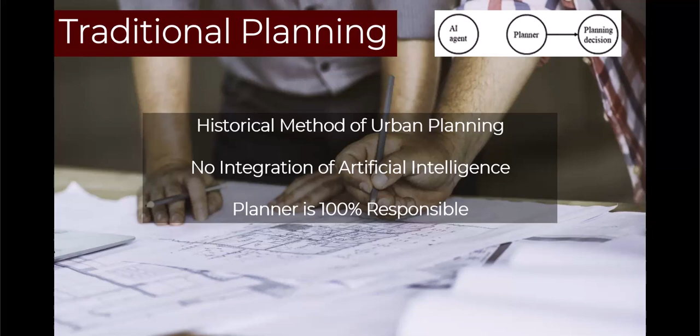AI-assisted planning. In AI-assisted planning, artificial intelligence can collect data, process information, and generate plans. In this level of artificial intelligence used for urban planning, its capabilities are analyzing large amounts of urban data, which includes land use patterns, demographics, and transportation flows. Additionally, AI generation of maps and plans can help planners visualize and analyze urban conditions.

Nonetheless, the planner is mainly in charge here. With the help of artificial intelligence completing time-consuming tasks such as data collection, the planner can make a more effective decision in a more efficient manner.

AI augmented planning. In AI augmented planning, artificial intelligence technology can be used to identify data that is difficult to collect or analyze. It also may uncover hidden patterns from large data sets, simulate stakeholder behaviors, predict impacts of planning options, and evaluate plans. Furthermore, this degree of artificial intelligence technology can also provide feedback and suggestions to improve plans.

AI automated planning. In AI automated planning, artificial intelligence demonstrates strong machine learning and automation capabilities to effectively automate the planning process. Here, artificial intelligence technology can identify urban problems, propose planning scenarios and solutions, and simulate and evaluate new planning policies. And to add to that, artificial intelligence can self-learn from other scenarios and become more intelligent over time.

As it learns, artificial intelligence can better handle uncertainties, provide viable solutions, and mitigate potential risks in the planning process. The planner in this level of artificial intelligence usage is essentially left to delegate and supervise planning tasks and procedures. Nonetheless, a planner can help AI systems learn by defining planning problems and proposing objectives. Overall, the planner fulfills a supervisory role and monitors the outputs of the AI system.

AI autonomized planning. In the final and highest intensity level of artificial intelligence usage is AI autonomized planning. To reach this phase, an AI system must be able to demonstrate a high level of intelligence and show its capabilities in achieving full automation in the planning process. As of now, there are no programs that can facilitate these demands, but a level of artificial intelligence that can reach and even surpass human abilities will be crucial in autonomizing the planning process while considering efficiency, equity, and domain knowledge of urban planning.

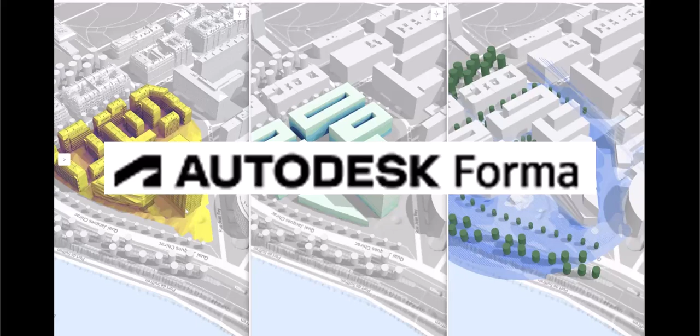Now, let's use what we know and see how we can apply that into urban planning and design. Autodesk Forma, which is formerly known as SpaceMaker, is designed to assist planning and design teams in digitally delivering projects from the very first day. It integrates conceptual design capabilities, predictive analytics by machine learning, and automations to create solid and sustainable foundations for projects. The platform enhances efficiency through intuitive project setup and design automations, aiming to improve the workflow of planning, architecture, engineering, and construction projects.

Oftentimes, planning design firms and teams may have several projects currently in their schedules. This creates a problem where there are several strict deadlines for multiple projects. Autodesk Forma successfully incorporates artificial intelligence to help planners, and even architects and engineers, to conceptualize initial urban design models quickly and efficiently.

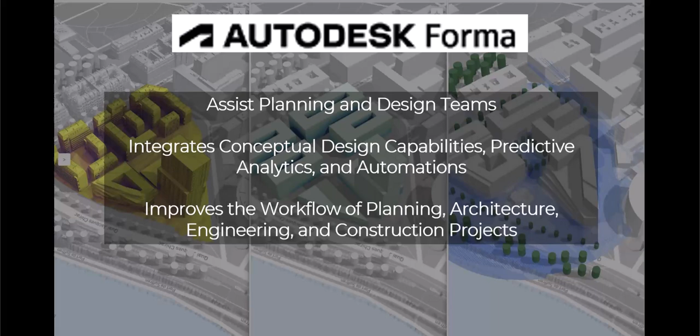The main features of Autodesk Forma that utilize artificial intelligence in their functions are the model generational tool, which is called the Explore tool, the predictive analytical tools such as wind, solar, and shadow analysis, and the automations of the parking demand calculator and site design generator TestFit. Together, these artificial intelligence tools help planners, as well as any other professionals who can greatly benefit from a rapid form of conceptualization in their projects, and lead them to better optimize their planning process.

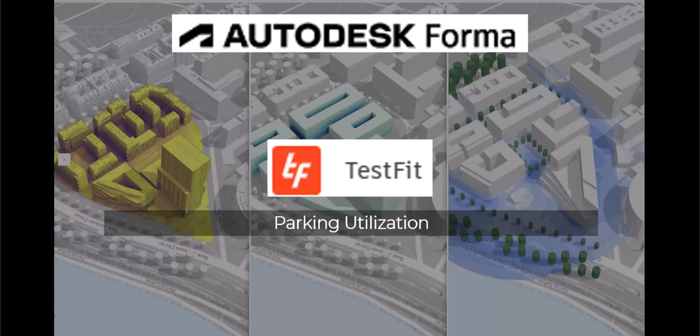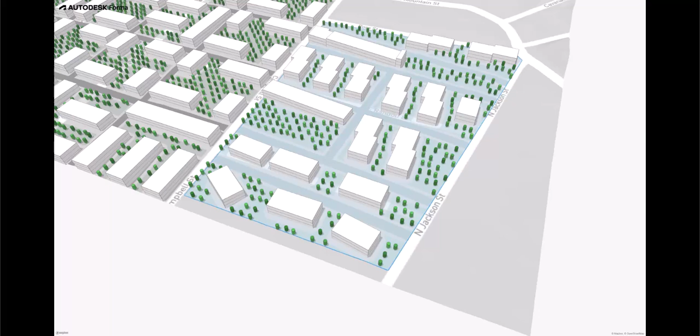The following models are made completely by the Explore tool, and surprisingly, the artificial intelligence integrated in this tool helped generate several models in mere seconds. This reduces the effort and time required in creating conceptual designs to near zero, which is much more efficient than traditional methods. Once again, this integration of artificial intelligence can prove very useful for urban planners and designers.

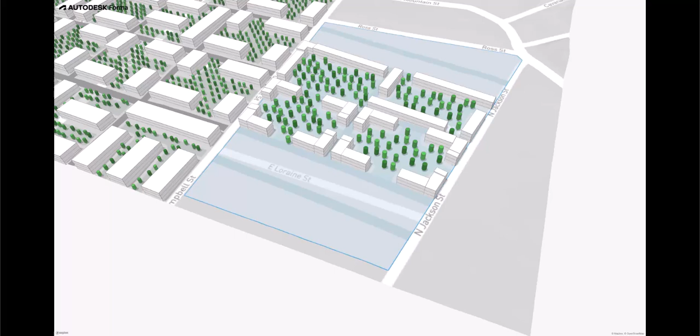Autodesk Forma can be accessed by accessing the Autodesk website on your web browser. Autodesk Forma does require payment. However, you can start a free trial to begin your conceptual designs. Once you have an account with Autodesk Forma, you can access your Forma Hub. Here, we can see our project workspace. You can always start a new Autodesk Forma project by clicking the New Project button. Here, we can select any area where there is geographic data.

Now, let's begin by looking at the Explore tool. The Explore tool can be found at the top of the tool ribbon. To begin, we need to set a boundary. We can do that by freeform drawing, creating a rectangle, a circle, or tracing an existing shape boundary. We'll start with a freeform shape.

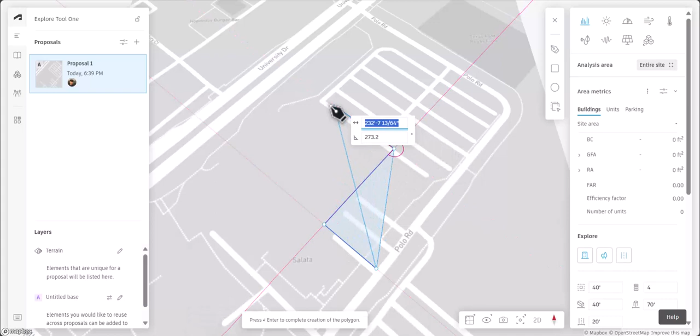As we can see, the generative abilities of the Explore tool have created long, thin buildings and trees, all within our site boundary. But what if we're not satisfied with this model generation? Down below, the Explore tool provides several model generation suggestions. For instance, we can have a long, thin building, several buildings with roads in between, and more.

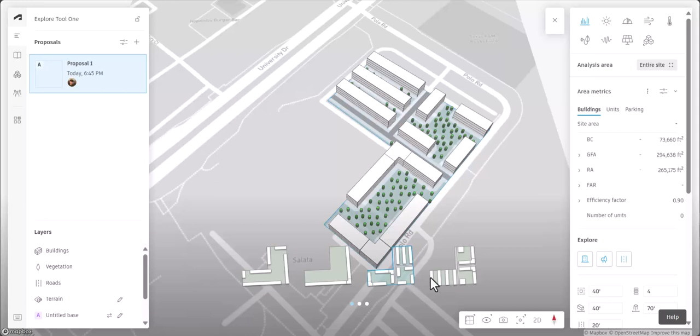Additionally, we can edit parameters within the Explore tool that can affect the generation of the model in various ways. On the right in the tool panel, we can scroll down and see the Explore section. Here we can edit the parameters that can affect the generation of our model. There are three main features in the model generation. We have buildings, trees, and roads.

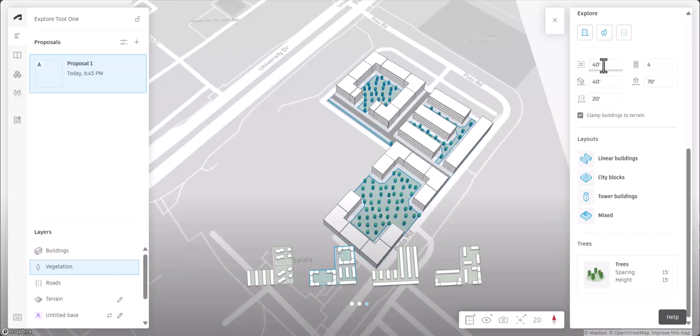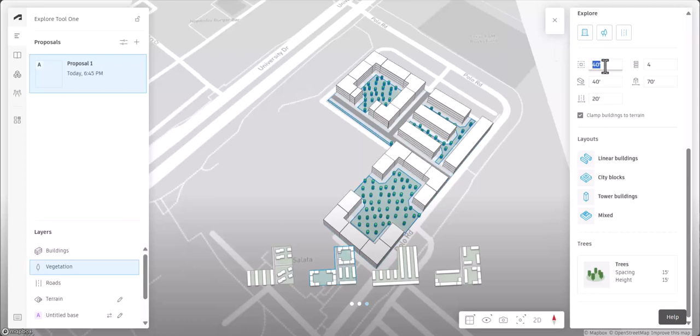Additionally, we have other parameters: division width, building width, road width, number of floors, and tower block width. These five features affect the dimensions of our model. We can edit the parameters and see how it affects the model. Let's begin with division width. Let's say we want 60 feet for the division width.

Now our buildings appear different. The Explore tool now demonstrates new model generations. From here, we can see more suggestions and select the ones we prefer. Another parameter that we can alter is the building width. Let's say we want thinner buildings. Now we see thinner buildings in the model generation.

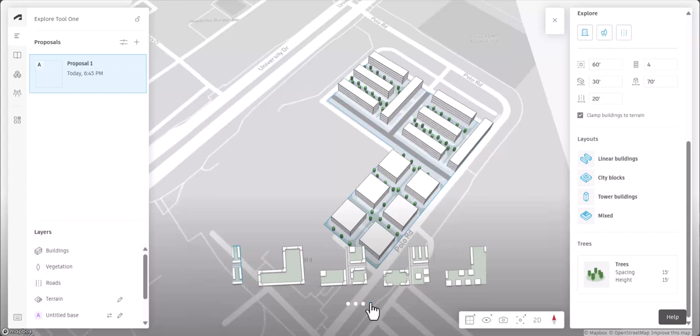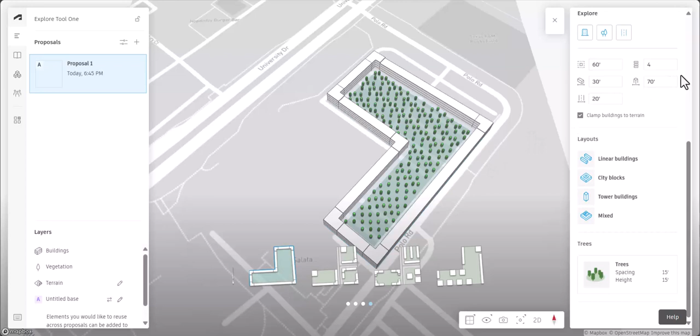We can also change the number of floors that our buildings can have. Let's say instead of 4 floors, we select 2 floors. Now our model generations all have 2 floors in the building.

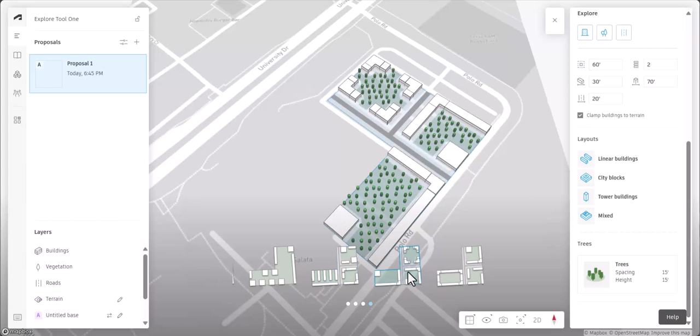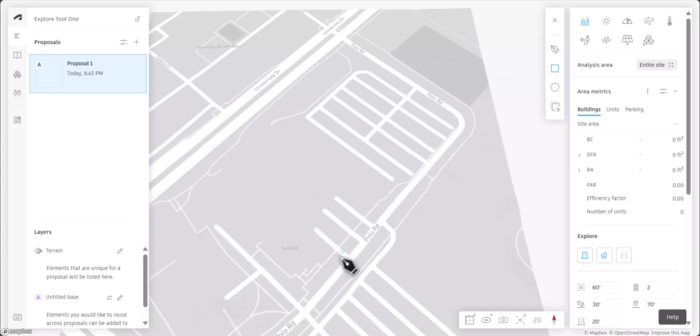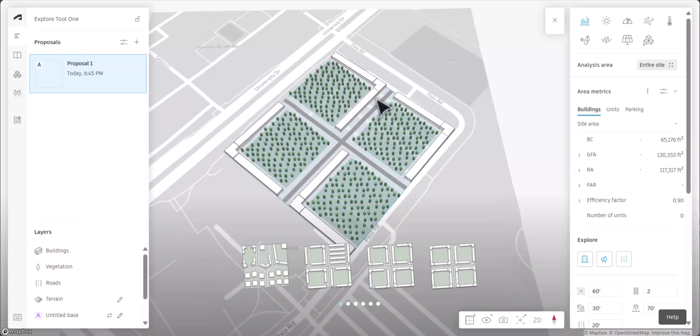Now, let's have a different boundary shape and size, and see what the Explore tool can generate this time. Once again, we go to the top of the tool ribbon and select the Explore tool. This time, we'll use the Rectangle tool to create our shape boundary. Just like before, the Explore tool generated several models of which we can choose. This time we have a little bit more variety.

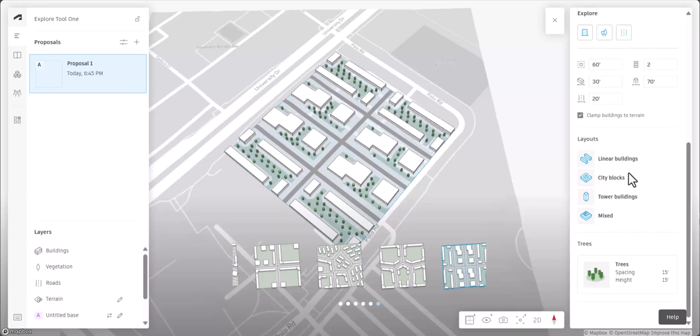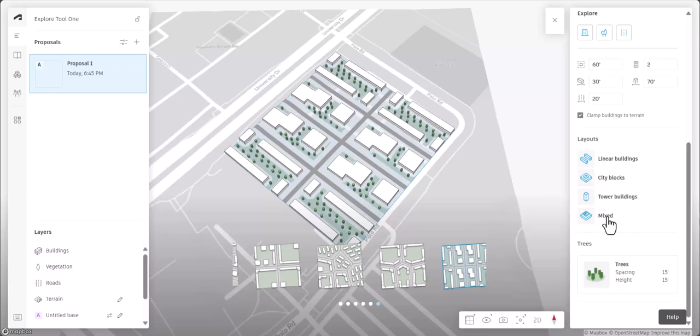Again, we can change the parameters of our model to better fit our needs. On the tool panel, and scrolling down to the Explore section, we can find a subsection called Layouts. Here we can find linear buildings, city blocks, tower buildings, and mixed buildings. At this moment, all of them are selected. Let's see what happens when we deselect linear buildings. As we can see, it generated models without many linear buildings.

Let's try it without city blocks. Now, the tool generated several model generations without city blocks. Now let's do tower buildings. And then we see several model generations without tower buildings.

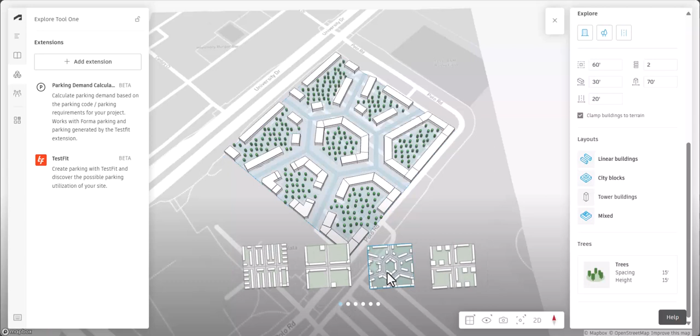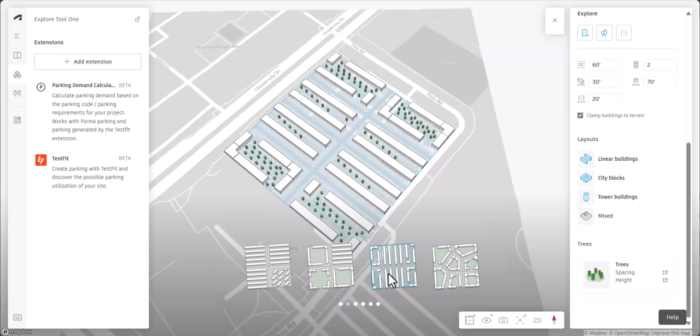And then last, without mixed buildings. And then once again, the Explore tool generated several models without mixed buildings. You can use any combination of layouts to create a perfect design to your liking.

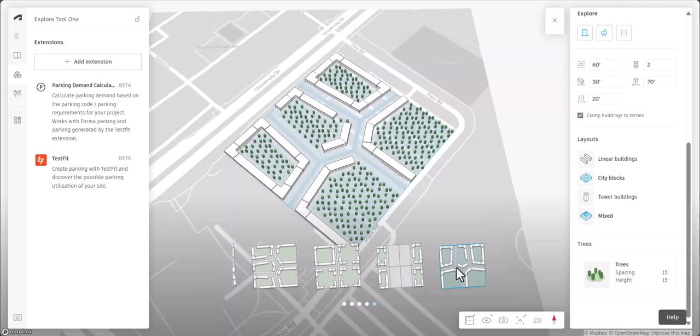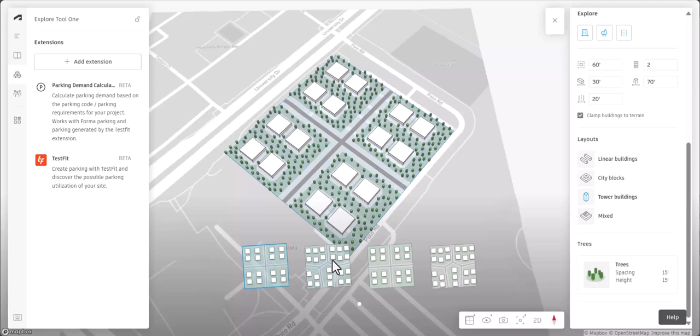Let's try without any other layouts besides tower buildings. Now let's try just city blocks.

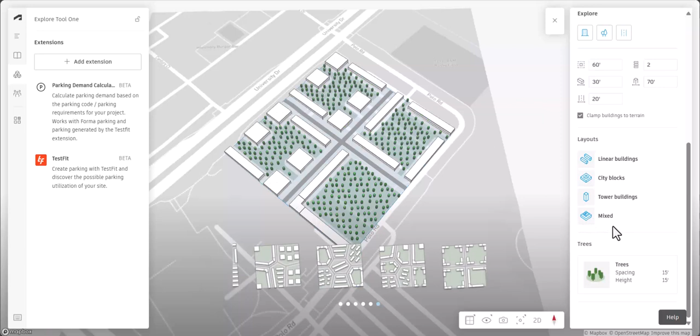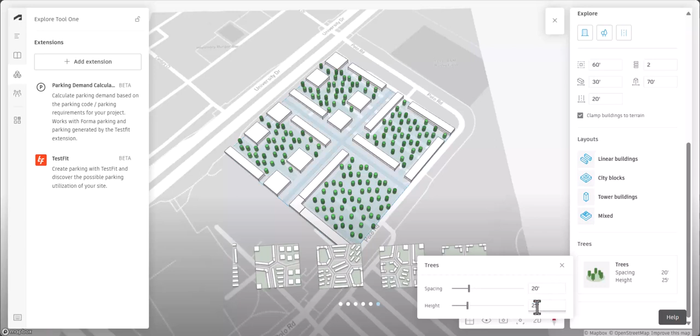Additionally, we can change the dimension of trees in our models. Let's select a tree spacing of 20 feet and a height of 25 feet. Now we see the Explore tool generate several models with trees that have changed based on the new parameters.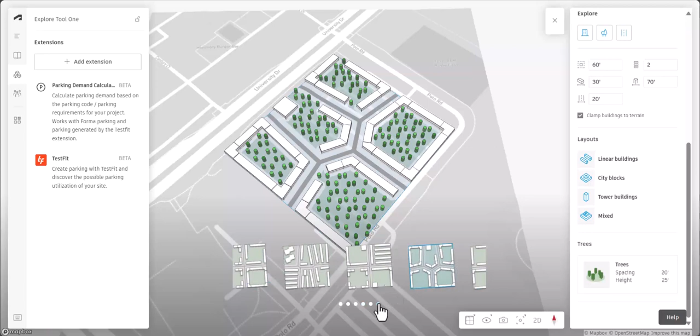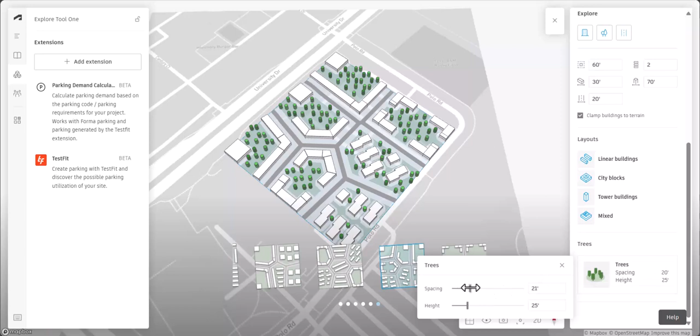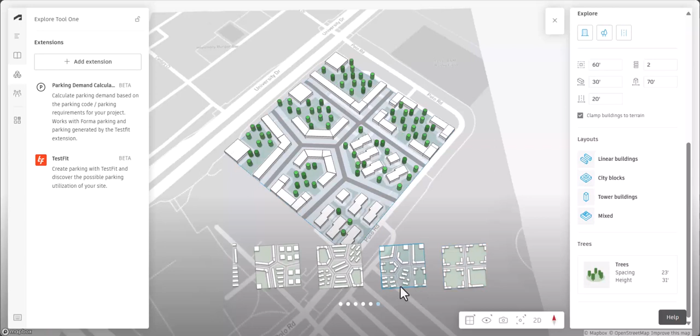As you can see, there's a large range of possibilities in which you can generate trees. Additionally, we can simply just select if we would like to have buildings, trees, or roads included in our model generation. Let's deselect roads for now. As we can see, the Explore tool generated several models without roads.

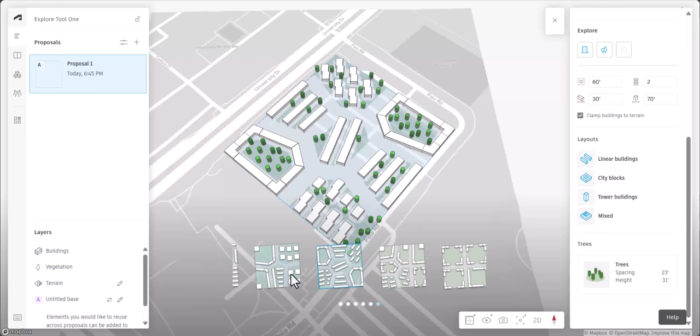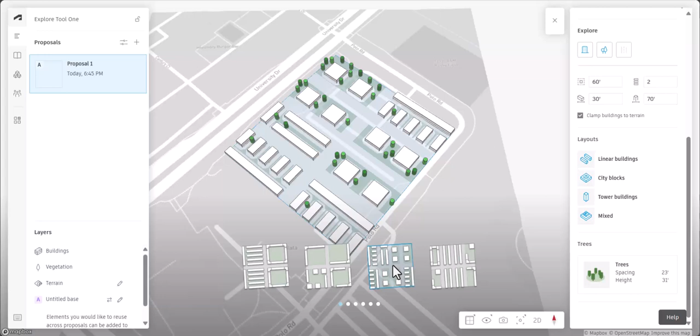However, we don't think this is practical, so we'll go ahead and re-include roads into the models. Now instead, let's deselect trees. Now our models have no trees.

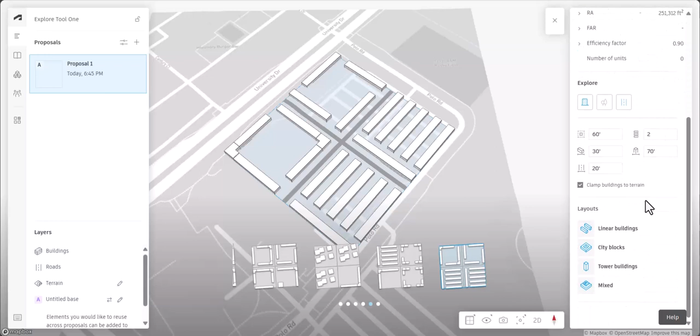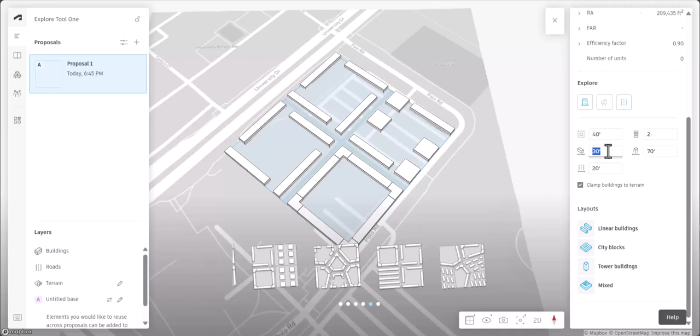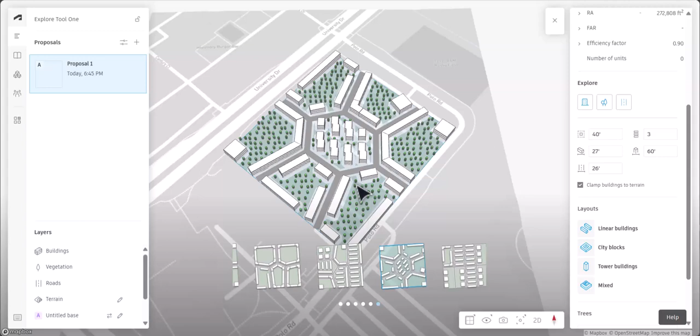We can play around with all these parameters and adjust these dimensions to better fit our needs for our conceptual designs. Let's say we found a design that we enjoy. We can look around and see how it looks from a 3D perspective. We can zoom in and zoom out.

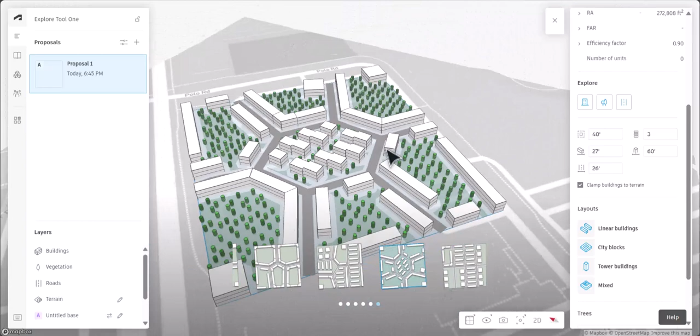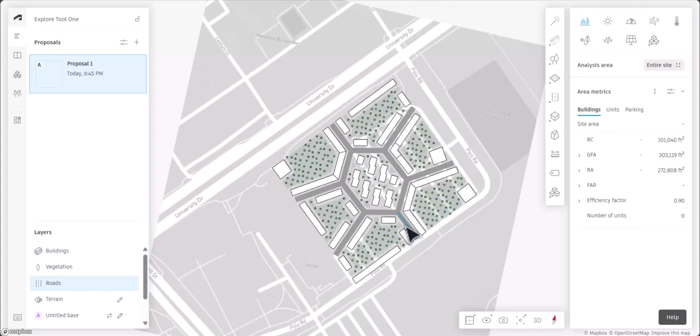We can also look at an aerial view. And we can take images.

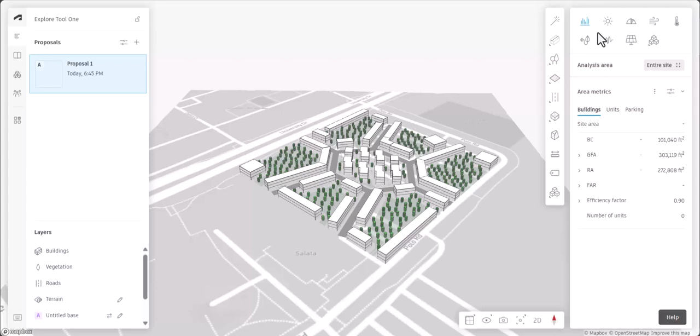Let's move on by looking at the predictive analytical tools that Autodesk Forma provides. At the top of the tool panel, we can see several tools that we can use. For instance, we can do solar studies, we can run shadow studies, and we can do wind studies, among many more.

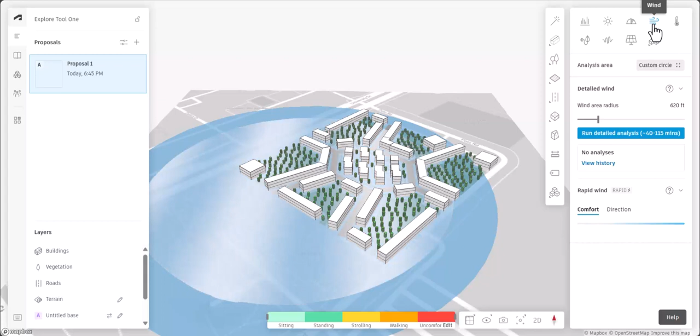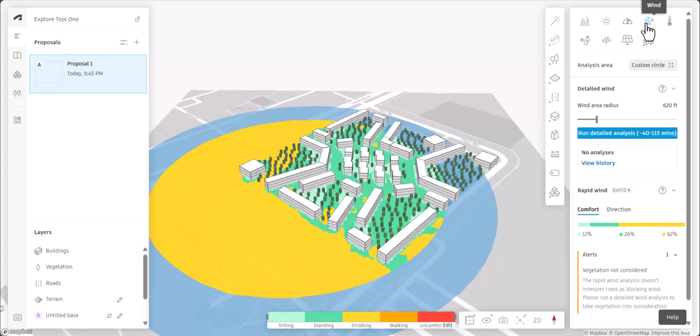Autodesk Forma uses these tools to run detailed analysis of our sites. For today, we'll just look at the wind analysis. In a simple wind analysis run automatically, we can see the varying degrees of wind. This is a comfort scale to check how wind affects the comfortability of people walking in the area.

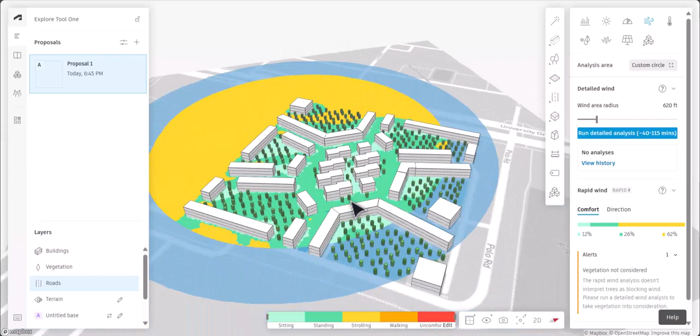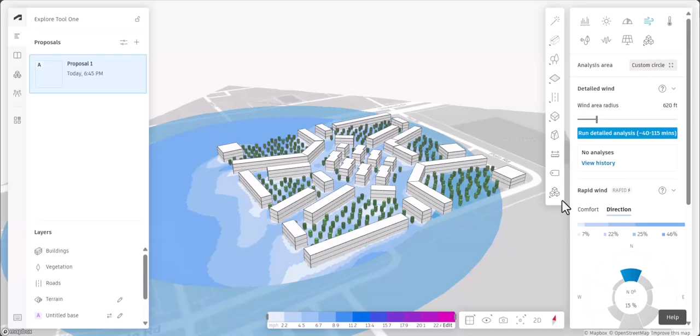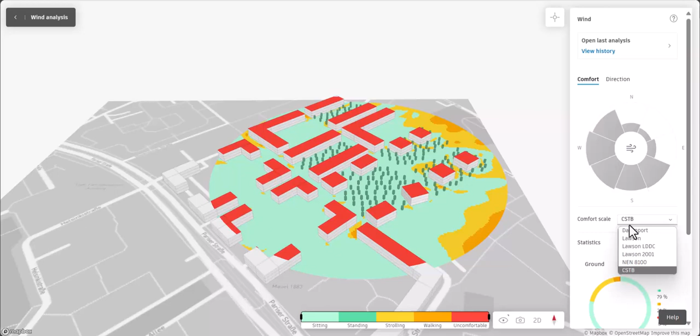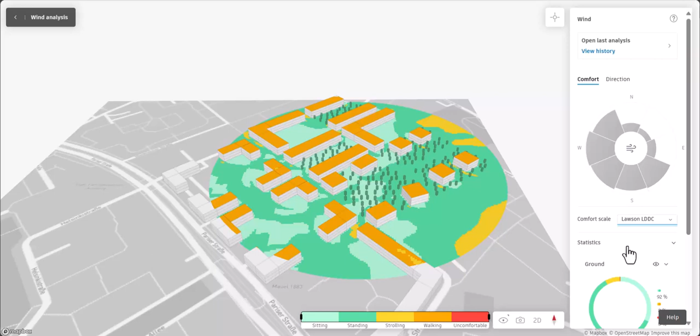There's also several comfort scales that we can choose from. And we can view a percentage of the comfortability locations in our site. Additionally, we can view wind direction and how it moves through the site. We can choose several wind directions from the site and wind speeds as well.

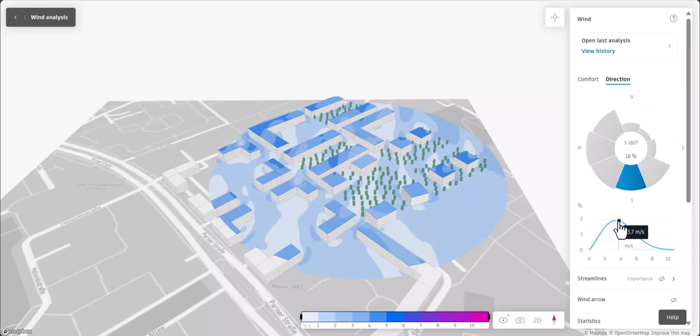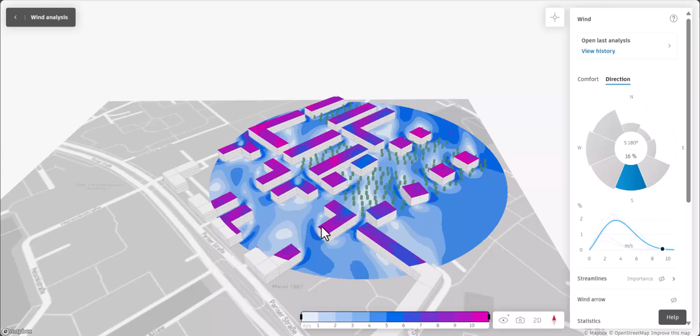Darker blue and purple and up to pink suggests there's a high probability of wind speed reaching higher speeds in these locations than other areas within the site. Lighter areas show that the wind may be more still and suggests that it's more comfortable for residents. Again, we can see a percentage total of the level of wind that is present in the site area.

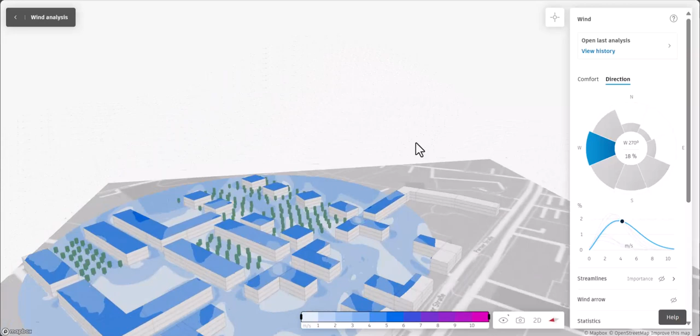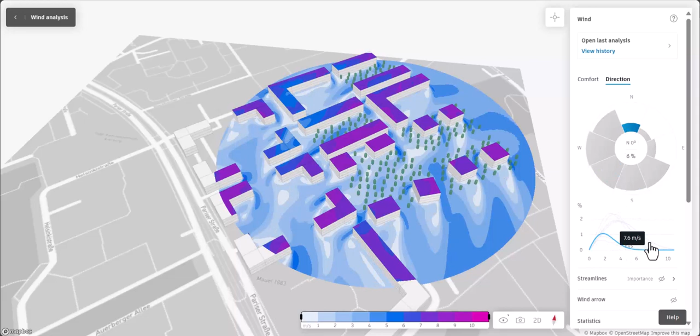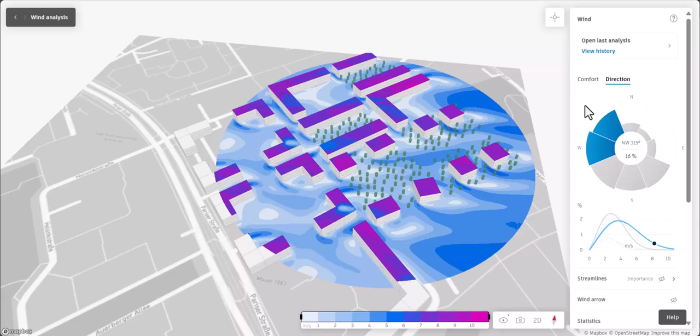And as before, we can see a 3D projection of the entire site. We can zoom in and we can zoom out. There's a great amount of flexibility within this site. We can simulate what wind speeds and wind direction can affect the site area. This shows that artificial intelligence can, with great speed and efficiency, create detailed plans and sites, as well as analysis.

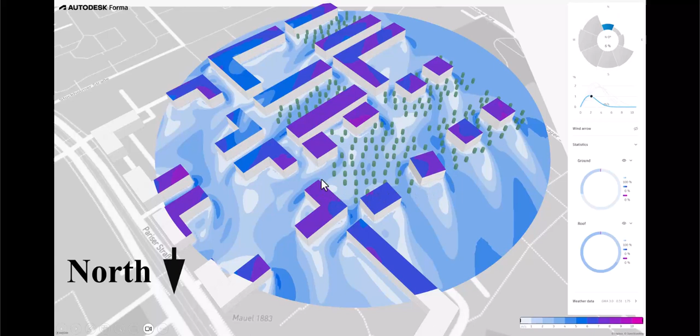Now, in this presentation of images, we can see the variability between different wind directions. A north wind coming from the north shows the wind directions through the buildings. Lighter areas are in this location, and the areas with trees. Faster winds can be expected on the roofs.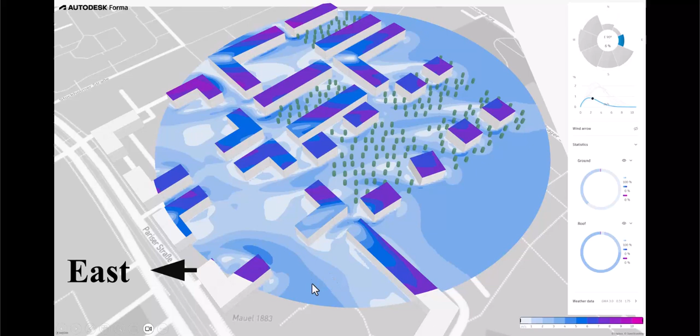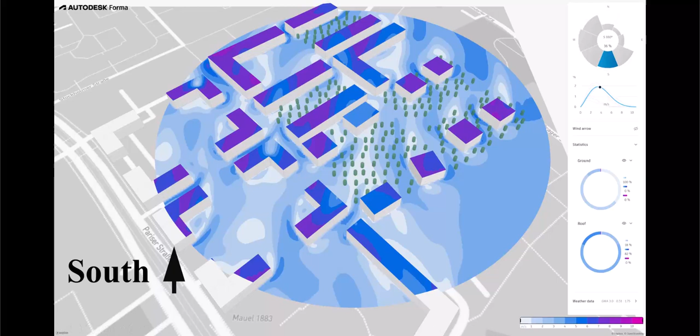Now we can see an east wind. In an east wind, we can again see a light location here, in this location, and this one. The building locations, additionally, are expected to see high wind speeds. A south wind is opposite of a north wind. However, the speeds still are relatively the same. We see lighter areas more in the tree regions now, and some spots between buildings. Once more, the buildings are expected to see higher wind speeds.

And finally, a west wind. A west wind shows that wind is slower in the same location up here, and also these locations. The region of trees in the middle has a slightly faster wind speed than the other wind directions. All of this helps us conclude that a wind analysis can be very beneficial when creating conceptual design plans.

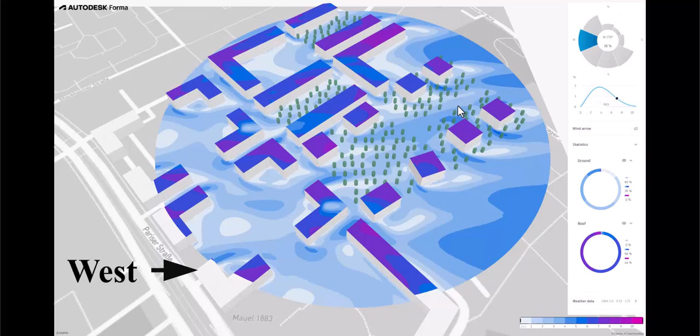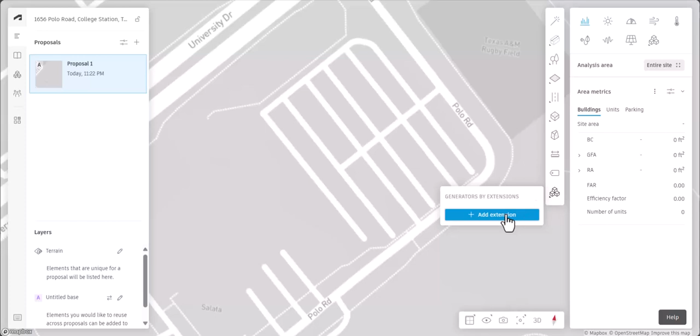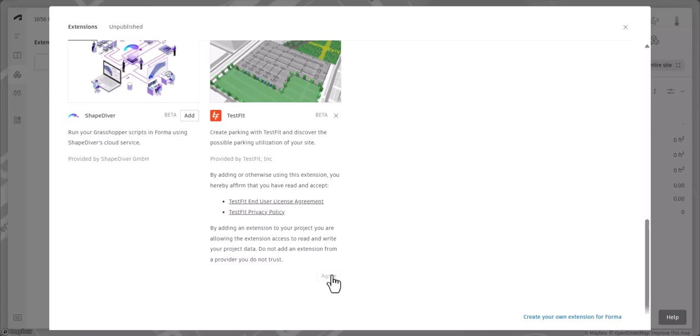Now, let's see how we can incorporate artificial intelligence to create a site plan of a parking lot. We can begin by locating the extension. We must select Add Extension. Here we have several extensions. We scroll down and select the TestFit extension and agree. Now we have our TestFit parking extension included into Autodesk Forma.

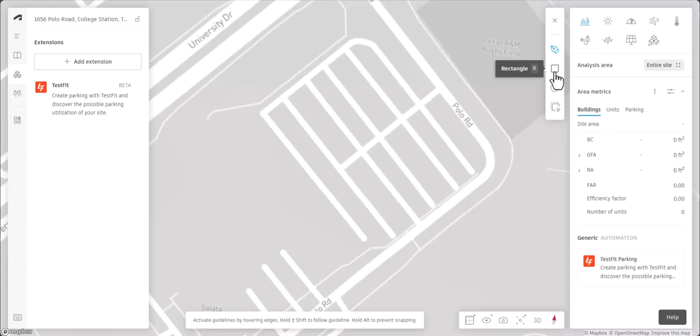To use the tool, we must begin just like before when we do the Explore tool. We must start with a site boundary. We can use the Freeform tool, Rectangle, Circle, or trace an existing shape boundary. We'll use a rectangle. As we can see, there's a parking lot created in our shape boundary. This is done automatically.